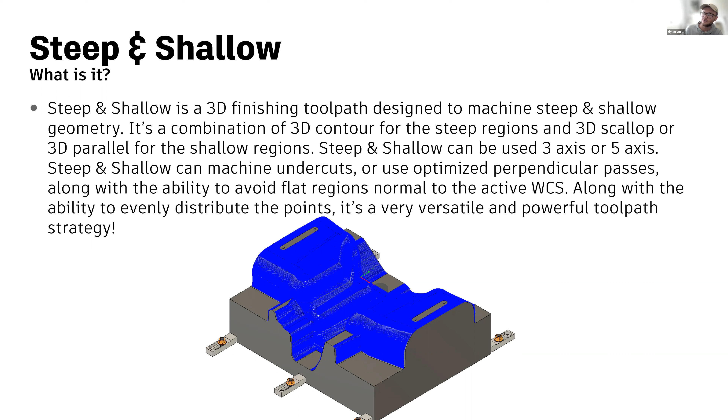Okay. So you'll all be pleased to know that that's my portion of the PowerPoint all done, and we are going to look at the toolpath within the product now. Now, again, this is going to be very casual. It's going to be very conversational. So don't hesitate to put your hand up and unmute if anything isn't absolutely crystal clear. If I haven't described something and you don't understand it, just ask the question and we can absolutely answer that live.

So first of all, we have a basic steep and shallow toolpath on the screen here. And firstly, it's worth noting that I have separated the shallow step downs from the steep ones, so we can clearly differentiate between the two. And this standard steep and shallow toolpath shows exactly what it's all about. You can see here that we are machining the steep regions and we're machining the shallow regions.

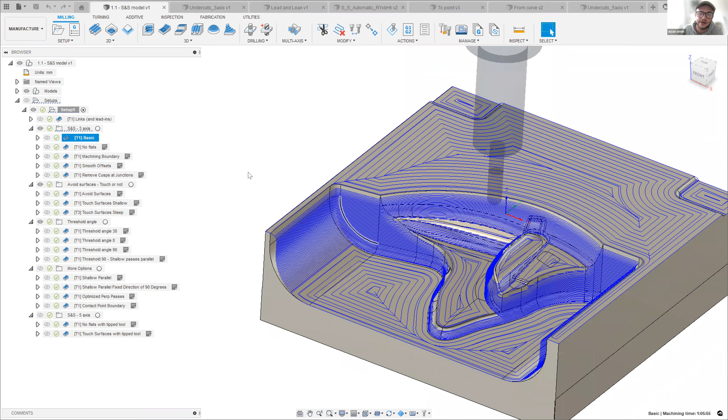Now, the first question which many people have is, how do we differentiate between what's steep and what's shallow? So what we can do is go into the toolpath dialog form, and in the 4th tab, which is our passes tab, where we describe the cutting environment, such as step over, step down, tolerance, stock to leave, etc. Right at the top here, you'll see threshold angle under steep and shallow. Now, the threshold angle is the angle which differentiates the steep and the shallow. So the default angle that we have here is 30 degrees.

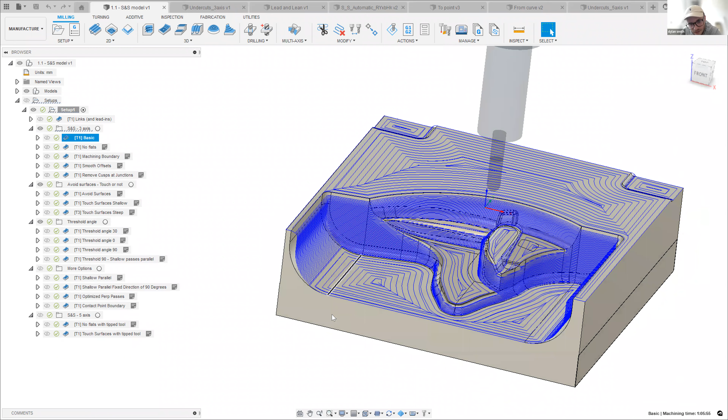Now, if I exit out of this, what you're going to see at around 30 degrees here is that these passes that are offset from this point here start to turn into a different style of cut. Now, that's that 30-degree angle, and that's the default value, as I said. But if we wanted to, we could very easily go into here and we could change that. And everyone has preference. Sometimes we'll have it a little bit higher, sometimes a little bit lower. And there's very good reason to even put it to 0 or even put it to 90, which we'll go through a little bit later on.

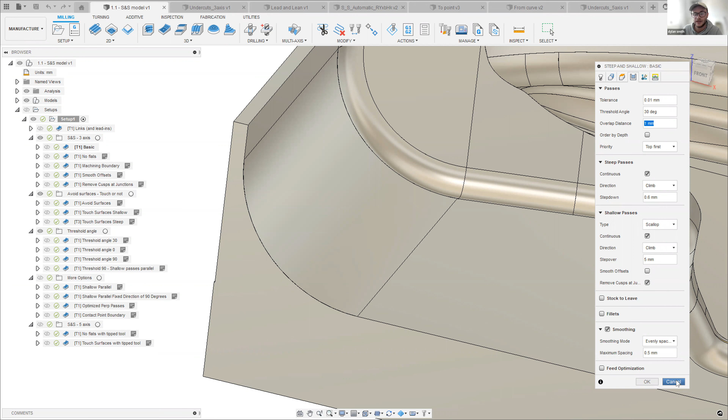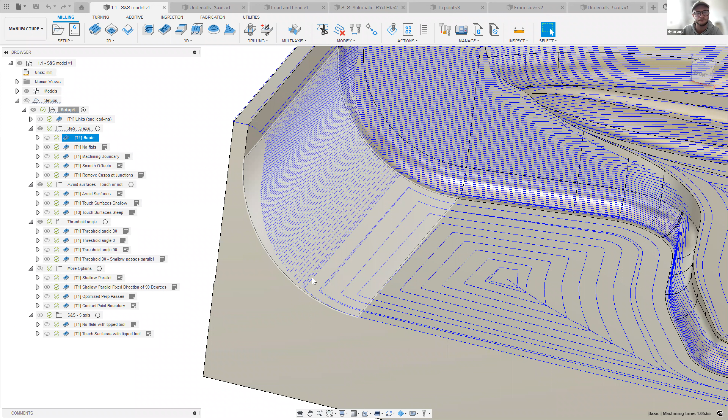The overlap distance is another key feature which is unique to steep and shallow. So because it's built up of numerous toolpaths, these toolpaths have to have an intersection point. They have to cross over each other by a certain distance. And the reason for that is because if they didn't cross over, we'd end up with residual material in between the two portions. So having some overlap distance ensures that we clear up all of the material that we need to clear up. Now, I really don't want to linger on the specific details, but if that's what you'd like to see as we go through, feel free just to post that in the chat.

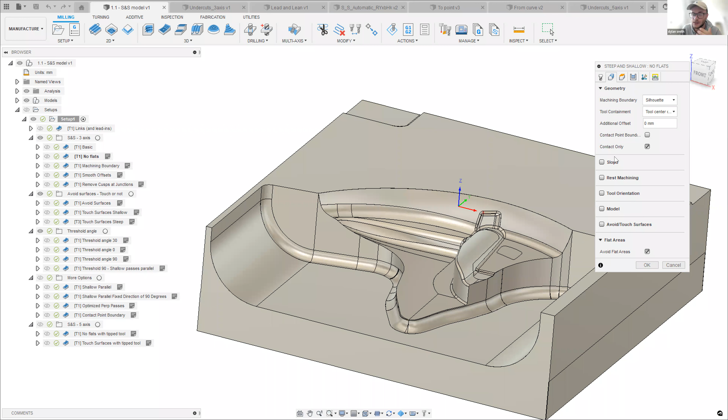So I'm going to be going through a couple of unique options in steep and shallow, and talking about why they're unique and why they're potentially beneficial to you. So the first one that I'm going to speak about is something that we call avoid flats. Now, if you have the Machining Extension, feel free to follow along, or make notes, even better. We have this area here called avoid flat areas. Now, when we are using 3D surfacing tools and using ball nose tools as our tool for the job, we generally don't want to machine planar regions like this, which are normal to the current work axis.

So if we approach these flat areas with this ball nose tool, there's a couple of problems that we're going to have. The first one is it's extremely inefficient. So if we have this top area here, to get a respectable surface finish, we're going to have to do a very, very small step over, something like 0.02 millimeters, and it's going to take us a hell of a long time. A much more efficient way to do this is to use a flat bottom tool and machine it with that. We're going to need far less step overs. It's going to take us far less time.

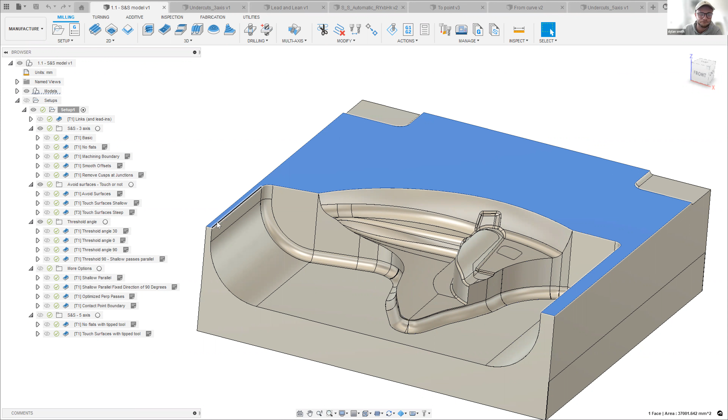The second benefit is to prolong our tool life. So when we're using a ball nose tool, one thing that we really want to avoid is cutting with the bottom and the center of the tool. And the reason for this is because, well, there's a couple of reasons for this. Firstly, there's not much speed in the middle of the tool. The further we move out of the tool, there's more cutting speed there, essentially.

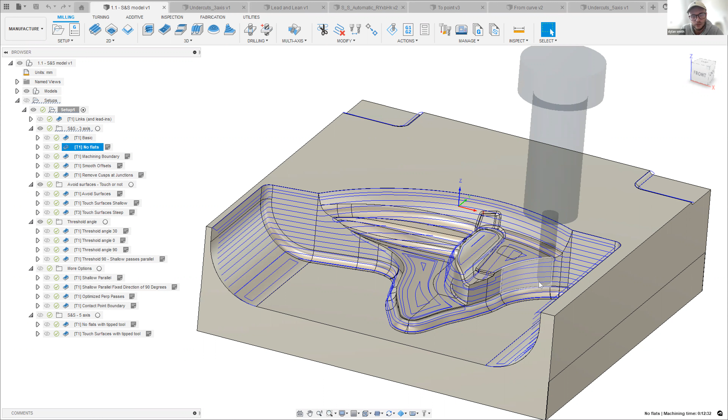Not only that, it's where the flutes meet, and there isn't really a sharp edge there generally if there's 3 or 4 flutes on the tool. So what we end up doing is more along the lines of rubbing the material as opposed to cutting it. So again, avoiding the flat regions is beneficial twofold. Firstly, efficiency, an absolutely massive one. We want to cut down on the time that we are taking to machine these components. And secondly, prolonging our tool life. Solid carbide tools are expensive. We want to make sure they last as long as possible.

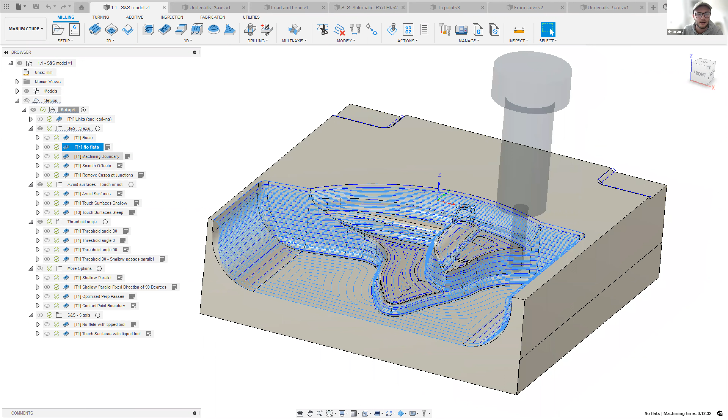Now, this option isn't particularly exclusive to steep and shallow, but if you are new to CAM potentially, it's nice for you to know that you can restrict your toolpath to a confined space that you've selected. So here, I only want to machine this portion here that's confined within this chain selection. So I've used a selection method within the machining boundary, and I've simply selected these edges here.

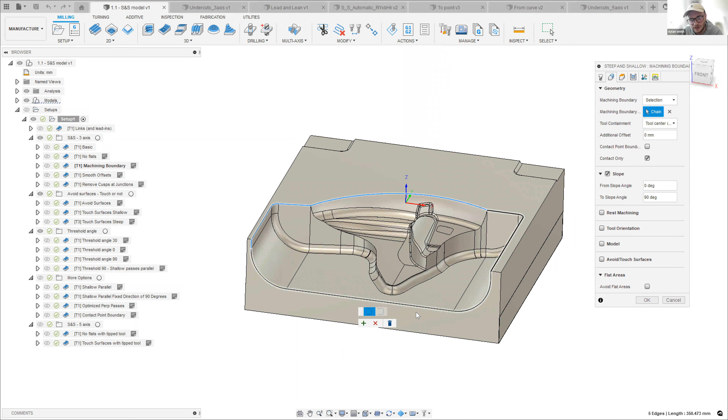And what we get is a 2D representation of that selection that I've made, and everything that is calculated from this toolpath will be kept within that selection. So again, that's a nice way of ensuring that we're not machining anything that we don't want to, and making sure that our toolpath is as efficient as possible.

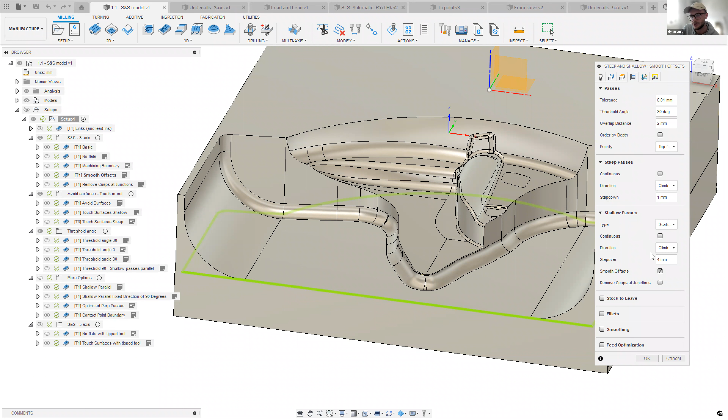There's a couple of other options which are exclusive to steep and shallow and that are very useful. So here we have an option called smooth offsets. Actually, maybe Craig can correct me in the chat if smooth offsets is exclusive to steep and shallow or not. You are correct. It is exclusive. Okay. So here we are again, we're in the 4th tab along. And the 4th tab is where we define our cutting conditions, and we have an option under the shallow passes called smooth offsets. Now, to really show you what this is, we're going to have to go from this toolpath to the next one.

So if we highlight both of them, what you're going to see is one of them has a fairly sharp turn to the perpendicular pass that it's going on to next. And the smooth offset has more of a filleted, smooth transition as opposed to that more jerky, sudden transition. Now, the benefit to smooth offsets is this is potentially something which can save you a little bit of tool life. It's not going to be a game changer, but it may save you a little bit. It's going to be less harsh on the machine because it's doing less of the jerky motions.

It may also save you some machining time because we're going to be staying at that programmed feed rate more often, because we're arcing round smoothly as opposed to a jerky motion, which is very abrupt. So our machine's going to like it, our tool's going to like it, our customers are probably going to like it because it's going to save us time.

Now, something to notice on these passes is that when we use a step over value, the step over value is calculated from side to side here. And one thing that unfortunately happens is that as we move down this section here, that value can be violated and we don't maintain the cusp height that we want to maintain. So the way that we can efficiently ensure that we are getting the cusp height that we programmed is by using something called remove cusps at junctions.

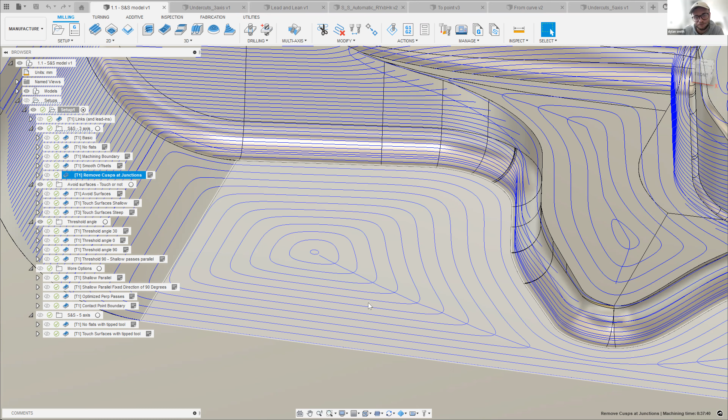So there are a few unique features within steep and shallow that can really make a difference. And again, we're just touching on some of the 3-axis stuff at the moment. We are going to jump into some of the more complex multi-axis stuff in just a while.

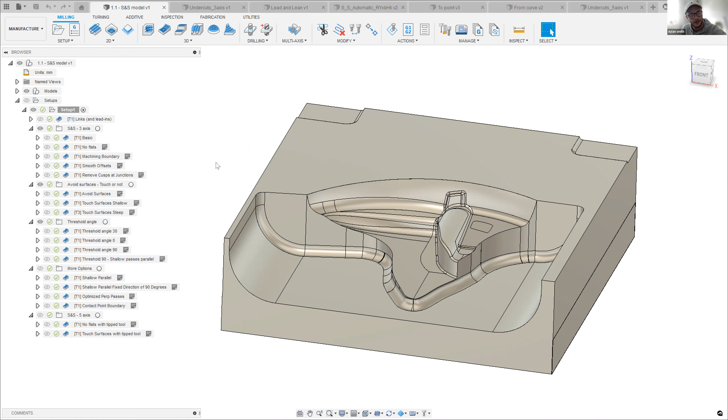So again, not all of this is completely unique to steep and shallow, but there are some options in here that you may not know about and may greatly increase the efficiency of your programs. So we're going to look at touch avoid surfaces. Now, I mentioned a boundary earlier, and we selected the outer profile of this section here to keep the toolpath within that. We can use that, and we can also use something called touch avoid surfaces. We can use that exclusively, or we can use it in conjunction with a machining boundary.

In this situation, I have selected this particular face here to avoid. Sometimes we do this because if it's something quite complex, if there are various different chains and it's difficult to get a boundary, sometimes it's much easier for us to just simply select the surface and say we just want to ignore that. So that's what we've done in this case. And you can see that the toolpath is exactly the same as it was up here, but all we've done now is avoid this face here.

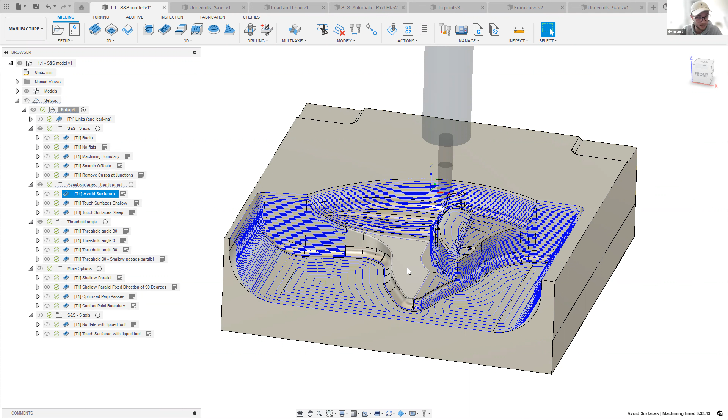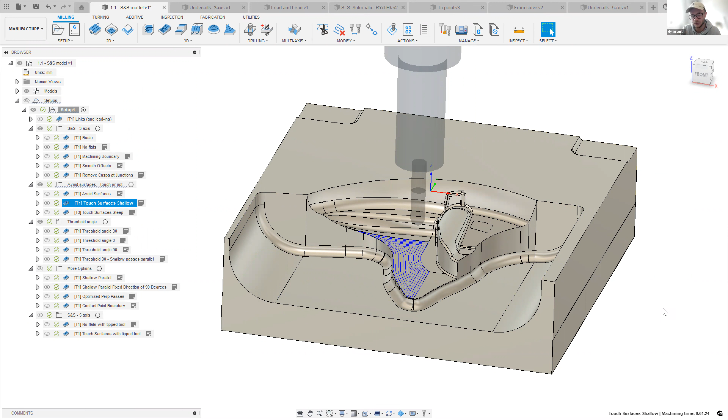Again, that can be very useful for avoiding particular surfaces which may require a different tolerance, a different surface finish, or a different manufacturing strategy. It's something nice to keep in mind, a nice tool to have in the toolbox. The opposite of that is touch surfaces. So again, going into the second tab, we've selected the same surface as in the previous toolpath, but we've simply selected touch surfaces. That means it's going to invert the selection; as opposed to avoiding it, we are now choosing to just machine the surface that we've selected.

And there's just one more example of something that we've selected which could have potentially been quite difficult to get a boundary around, because remember, the boundaries are 2D. And if we're looking at a steep portion of geometry, by the time we've selected that boundary, that may end up being very small. So touch avoid can be very useful.

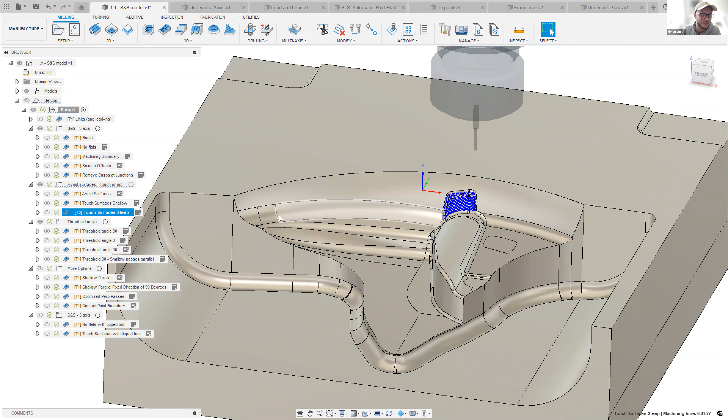Now, a few more options to go through here. We've got options to use parallel, and what we'll see in here is that we are using a parallel pass, so a step over of 3 millimeters, and you'll see how we are doing our shallow regions using a fixed direction of cut, and the steep regions are still acting as we would have expected them before.

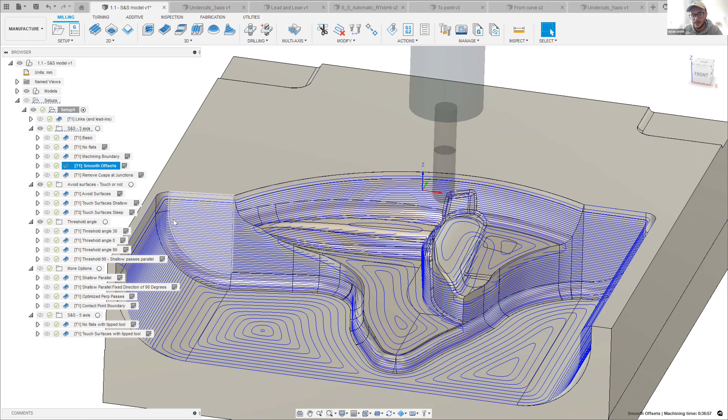The benefit to using parallel is that generally when we're only cutting in one direction, we can get a superior surface finish. But one of the issues is that we may be potentially bunching up some of these faces. So on a more free-form surface like this, something like scallop will be better because it'll offset from the outer curves. But parallel and scallop can be used interchangeably, and each one suits different situations for different geometry; they both have pros and cons.

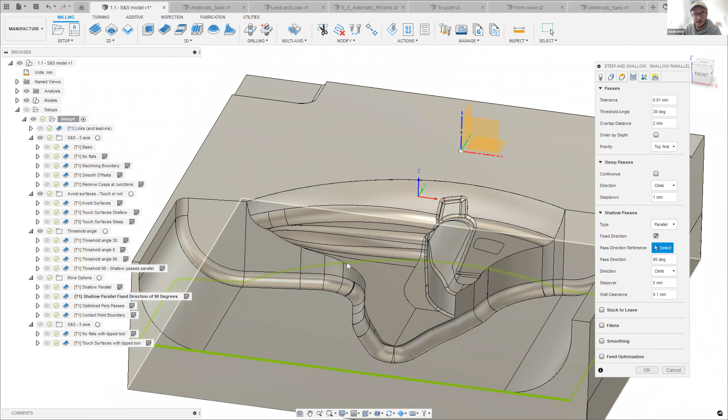This is another parallel, but all we have different here is that we've set a fixed direction. So with parallel, if we select to only go down that edge, then our parallel cuts are going to run parallel to the selection we've made. But a nice tip to note is that if we don't make a pass direction reference, the parallel cuts will run parallel with the x-axis.

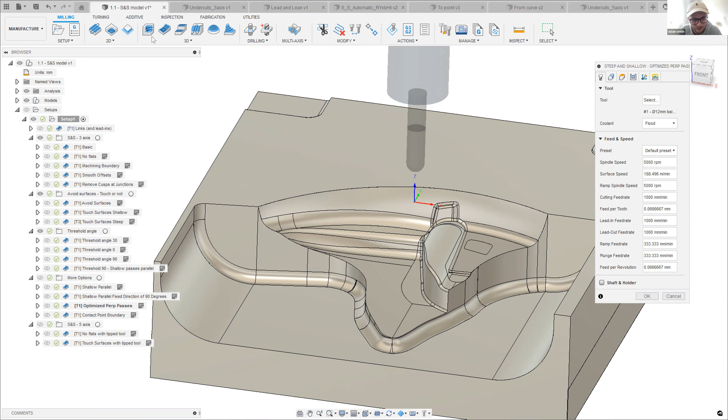And I mentioned something called optimized perpendicular passes earlier. Now, for those who are in the mold making industry, this is a very powerful piece of technology which was brought over from PowerMill, which is one of the leading products in the mold and die industry. And the reason is, as I mentioned earlier, we typically like to follow one direction. That gives us a very nice surface finish.

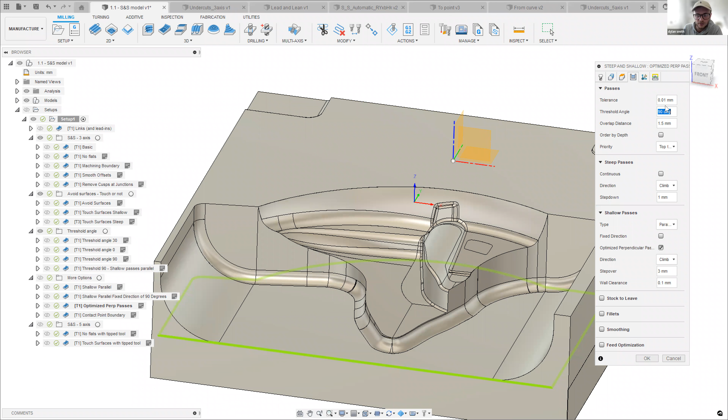But when we're using parallel, because it's designed for shallow geometry, as we start to go up steep walls like this, where the steep wall is running parallel to our cut direction, the toolpath starts to fragment and we don't keep the constant step over anymore. So when we set the threshold angle to 90 degrees and turn on optimized perpendicular passes, when we get to a 45-degree wall, we have parallel passes which are perpendicular to the other ones.

So you can see these here are all fine. These are going to give us a very beautiful result and a very beautiful surface finish on our component. But as we get to these steeper areas here, Fusion 360 is intelligent enough to input perpendicular passes to bridge the gap and ensure that the passes running up the steep regions aren't fragmented. And we're going to maintain that constant step over that we inputted.

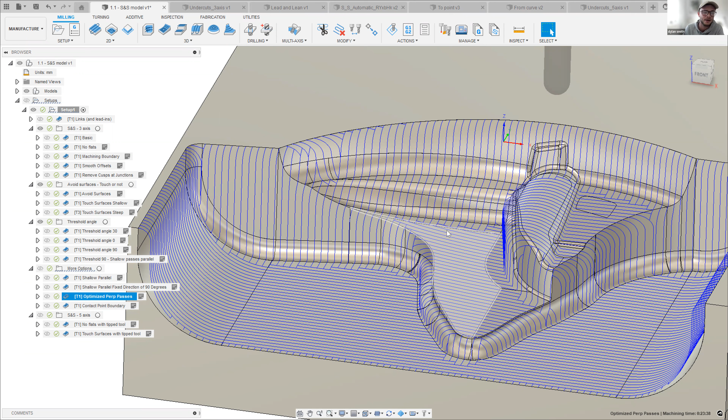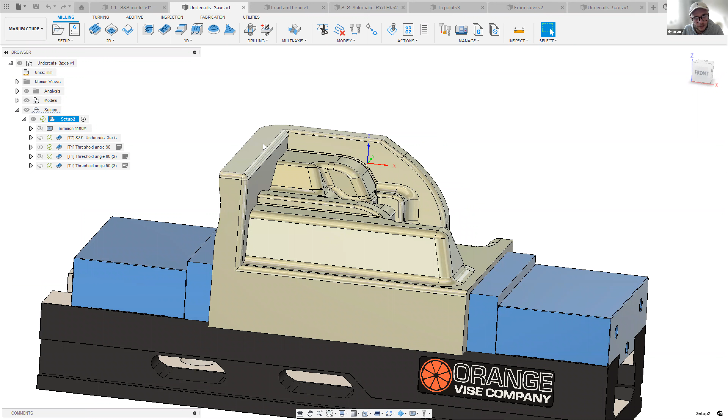So moving on to a little bit more 3-axis stuff, and we are going to look at undercuts. So when we think of an undercut, what we're thinking of is a region of geometry which isn't accessible in a 3-axis orientation to our work plane. So if we look at our component here, we are coming in a very conventional manner. We've set our component up in the vise, and we are going to be coming in from the top here. Now, it's pretty apparent to see that we're not going to be able to access this area here in a 3-axis manner with a straight fluted tool.

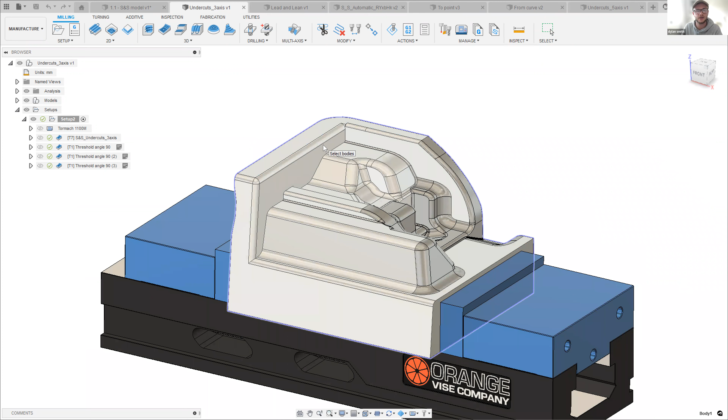Now, a little tip, which is slightly off piste, which may be of value to people, is that we have a tool called accessibility analysis. And what that tool does, it allows us to select a component. I'm not sure where that's gone there. I think I've got one. So it allows us to select a component, and then it allows us to select an axis in which we're going to come from.

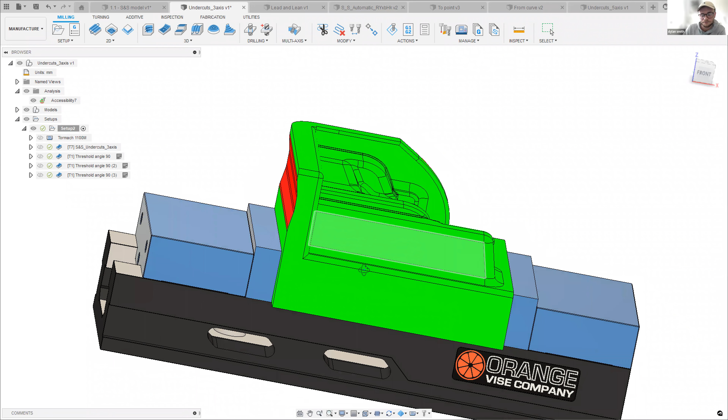And in green are the areas which are accessible from that orientation, and in red are the areas that are not. Now, when we select the axis to come from, we select a planar face, a linear edge, or a true cylinder. So in this case, we've just selected the top face. And that's all saved in the browser tree over here, and we can turn it on or off at our leisure.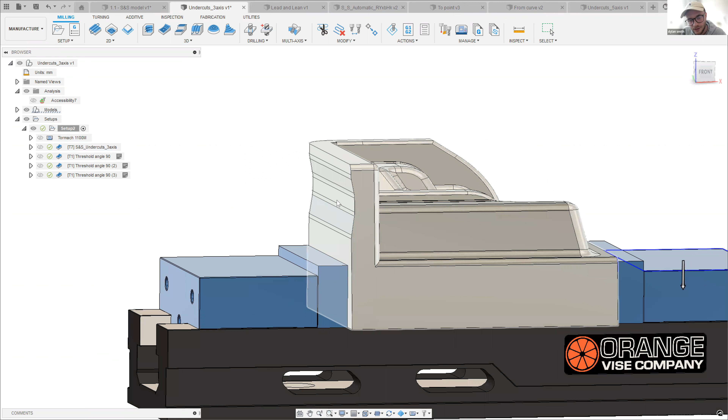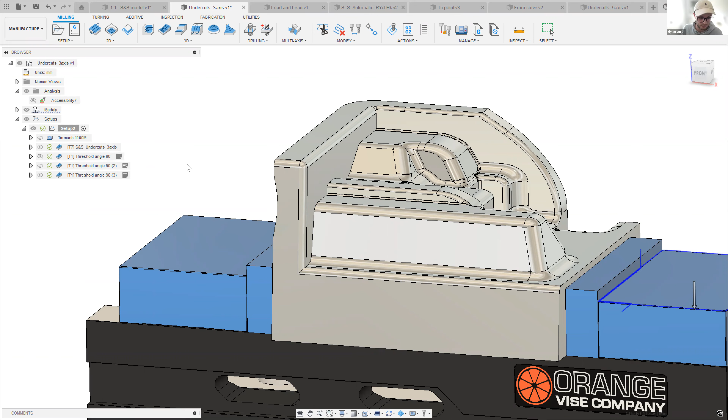Now, the way that we've managed to machine these undercuts in a 3-axis manner is by using a lollipop tool. Now, a lollipop tool is a tool that has a shaft, and the cutting portion of the tool is larger than the shaft, which means that we can access areas like this without leaving the 3-axis orientation. So the toolpath that we have looks something like this, and you can see this is the tool that I've used. Let me just show you how we got to this result.

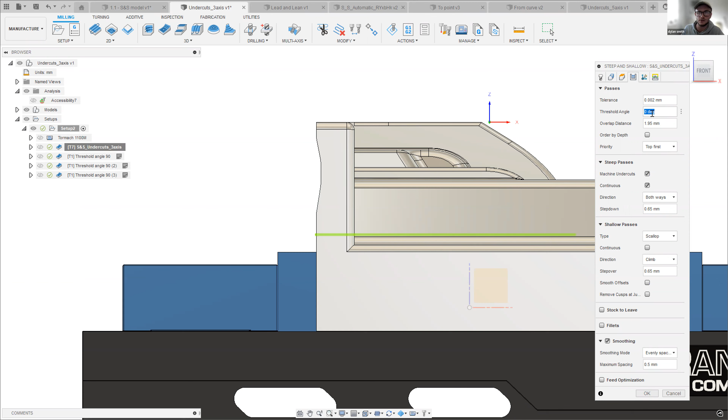So I mentioned at the start that Steep and Shallow is a blend of 3D contour, 3D parallel, and 3D scallop. And we actually have the ability to turn Steep and Shallow into any of them by using the threshold angle. So when I turn the threshold angle to 0 degrees, that forces Steep and Shallow to be steep only. Now we are only using 3D contour. So we're able to get results like this from a toolpath which is designed to do steep and shallow areas.

This is one of the key benefits, and I mentioned right at the start that Steep and Shallow is a very versatile tool. And this is one of the aspects which adds that versatility. Being able to tweak the threshold angle, being exposed to these more complex options as we tweak the threshold angle really allows us to do a lot with this tool. So again, if I turn the threshold angle to 10, what you'll notice is that this option disappears. But as we turn it to 0, that option reappears.

And that's because, of course, when we are machining undercuts, we only want to use the steep variation of the toolpath. So it doesn't make sense for us to expose that option when the threshold angle is anything but 0. These can be quite difficult things to find. So again, if you've got a pen and paper, or if you are in Fusion, it's worth making notes of this stuff. Threshold angle 0 means we are using the steep portion of the toolpath. When we change it to 90, we are then using the shallow portion of the toolpath. But of course, it defaults at 30.

Another point that I want to talk about, and again, I apologize if this is like drinking out of the fire hose, but it's a very complex toolpath. There's a lot to speak about, and we only have an hour, unfortunately.

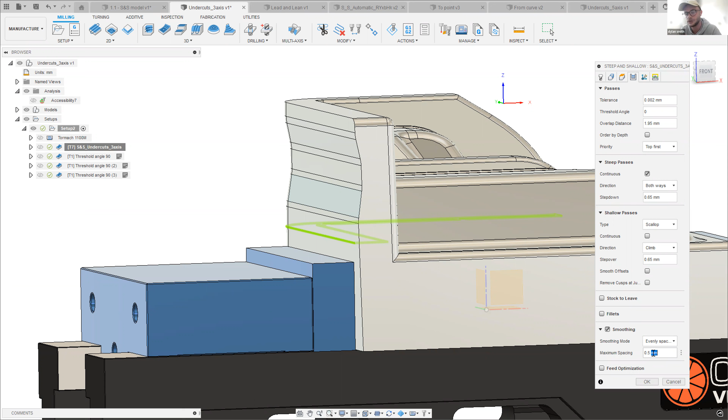Now, when we have a more fluent, smoother motion on our machine, what we end up with is better surface finish results for one. And not only that, the biggest unexpected benefit we get is that we generally see a more efficient toolpath in regards to cycle time. So because the machine is maintaining the programmed feed rate more often, because of the more fluent axis movement, we generally have a more efficient cycle time and again, a better surface finish result. Now, this is useful when we're looking at 3-axis toolpaths, but it really comes into its own when we start to look at multi-axis toolpaths and when we have all the axes moving at once.

Now, we are going to switch it up a little bit and look at some of the multi-axis, or maybe is it worth me answering a couple of questions or looking at the chat just before we transition?

I think you got everybody's mind blown. There's no questions on this. I'm just sitting back learning.

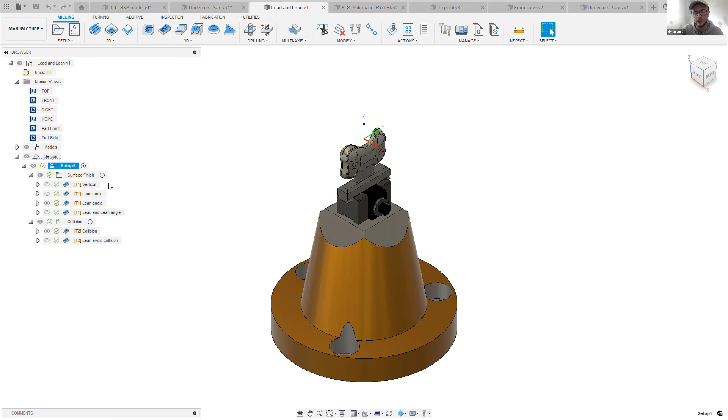So now we're going to move into the multi-axis part of steep and shallow. And if you thought that this was a very powerful tool, looking at the 3-axis stuff, the 5-axis stuff just compounds that even more than what you already thought. So we're going to initially look at what I would probably say is the most simple area of multi-axis that we have. And this is what we know as lead and lean.

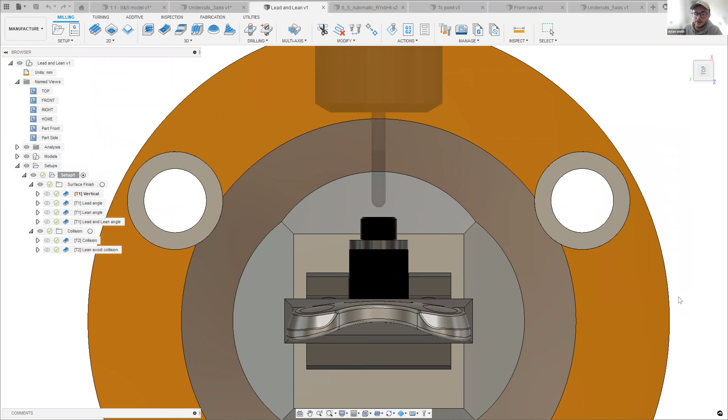So I spoke about a very prominent issue earlier within milling specifically, and this is when we're using ball nose tools and we are machining with the center of that. Let me just turn my leads and links off. When we're machining with the center of the tool, there's no surface speed in the middle, and there's also not that many flutes there. So we are wearing the tool away quicker than we would have wanted to, and we're probably not getting the surface finish that we expected.

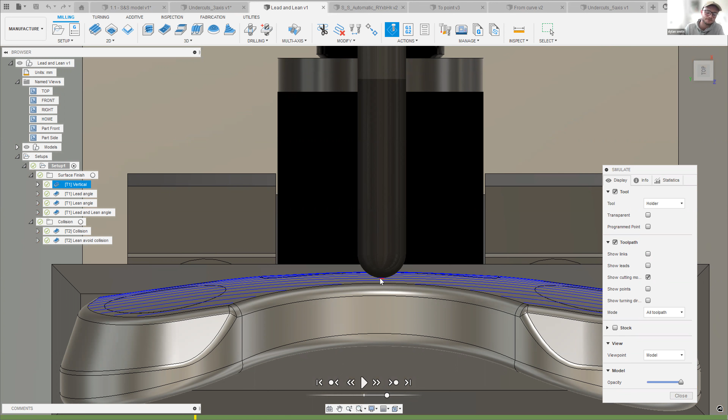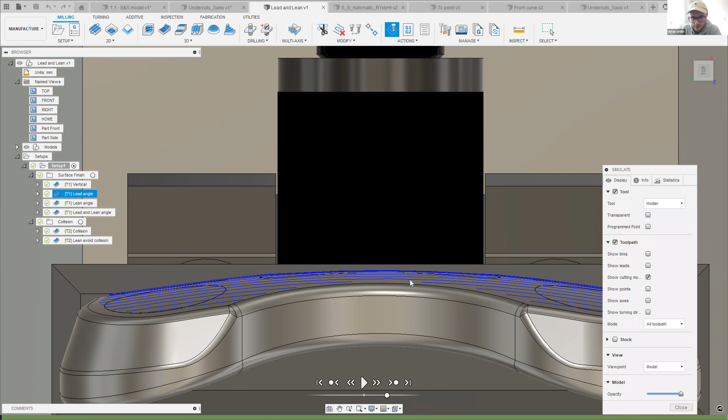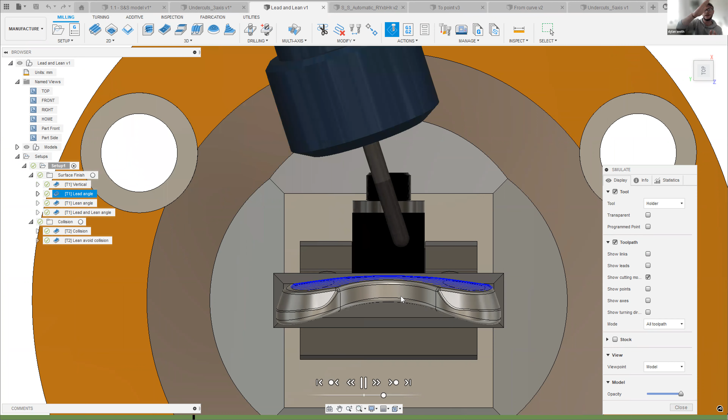An easy fix for this is to use something called lead and lean. So when we say lead and lean, a good way to think of it is when we are leading with the cutting direction. If I just show you that on here, that'll be better than me butchering the explanation. If I can find a point. So what you'll see there is that our tool has been knocked over slightly. Now, this is always going to be leading forward and leading parallel to the cut direction. So if I give this a play, what you'll see is that we are constantly tilted forward there. If it was going 2 ways, the tool would then come back the other way.

But this is a very good way to move that cutting point from the center of the tool and to get it more onto the flutes. You are going to see a better surface finish result using this technique opposed to using the middle of the tool. Now, we can also do something called lag. A good way to think of it is lead is leaning forward, lag is lagging behind. Lead is generally preferred, but I'm sure that lag has its applications within the industry.

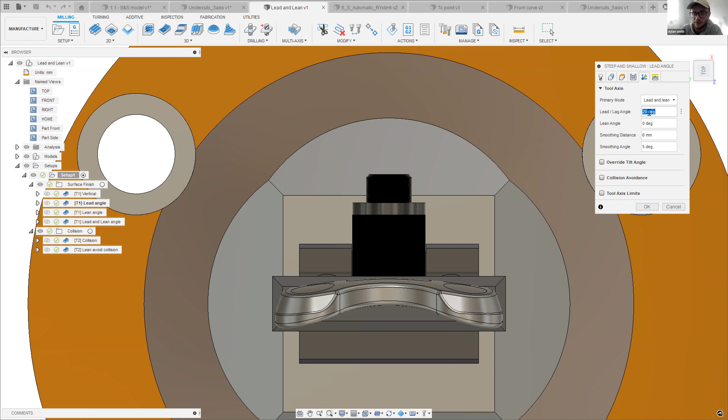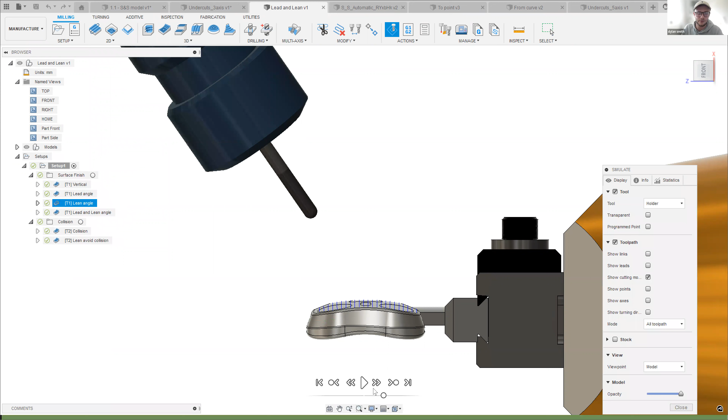And then we also have something called lean as well. I'm sure most of you have probably figured out what lean means, and lean is essentially perpendicular to lead. So opposed to leaning parallel with the cut direction, we are now leaning perpendicular to the cut direction. Again, similar reasons why we do this. One reason could be to potentially avoid any work holding that we've got. So that would be a very valid use case in this example. But again, primarily one of the key benefits here is getting that cutting point from the center of the tool.

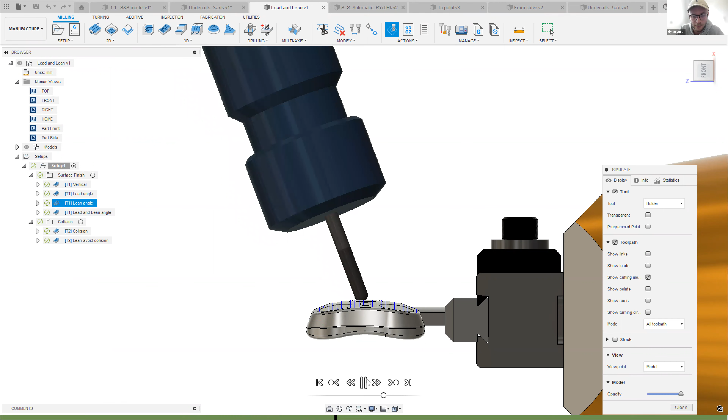Just check my time, 30 minutes past. Okay, so I've got about another 10 minutes.

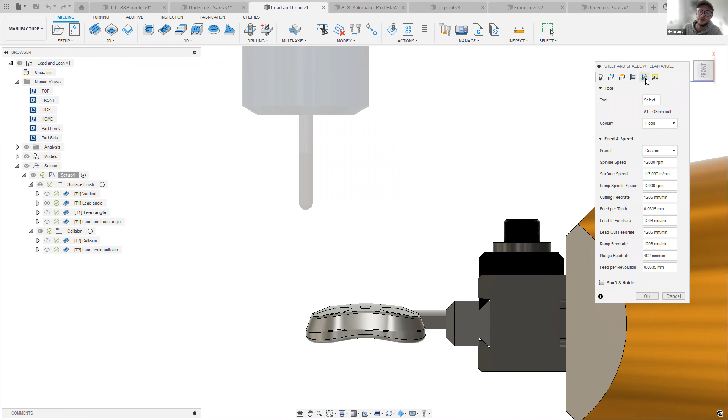I just want to ensure that we went through how we set that within the toolpath. So if none of you have used any multi-axis tools within Fusion before, you'd be used to the 5 tabs on the top here. When we have multi-axis capability, we have this 6th tab here, which is our multi-axis tab. Now, it's going to be very difficult for us to get through everything in a comprehensive manner today, but what we've done here to get lead and lag is select lead and lean as our primary mode. And we've simply just been able to input an angular value within one of these areas.

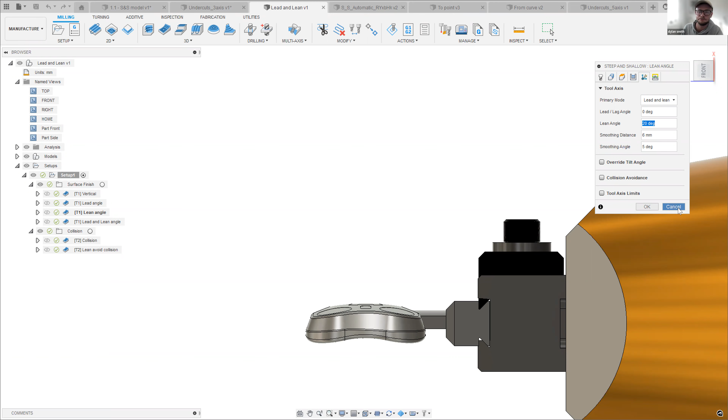It is genuinely that easy to create a multi-axis toolpath, and that's one of the key benefits to using Fusion as your multi-axis solution. It's the power, it's the versatility, it's the ease of use, it's the familiar user interface. There's a lot of benefits. So if we move on to another example here, and this is a vastly different part to the last example, showing you how many different kinds of geometry steep and shallow can handle.

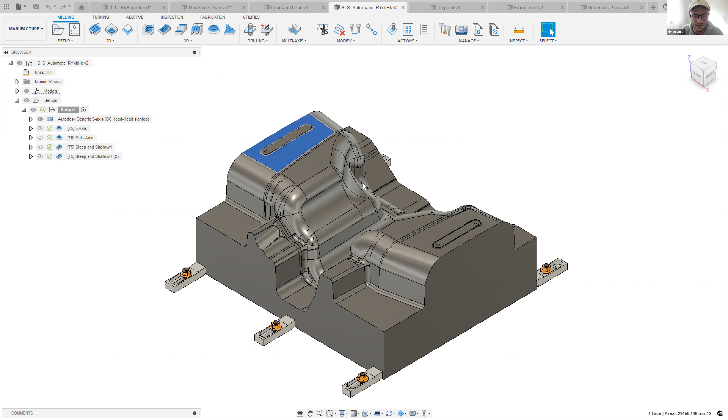And this is what we know, or what Craig would call a very complex feature-rich part with various vertical walls, various pockets, cavities, and it's extremely difficult for us to machine a component like that. It's got super steep pockets, a lot of different angles, a lot of free-flowing surfaces, steep areas, and shallow areas.

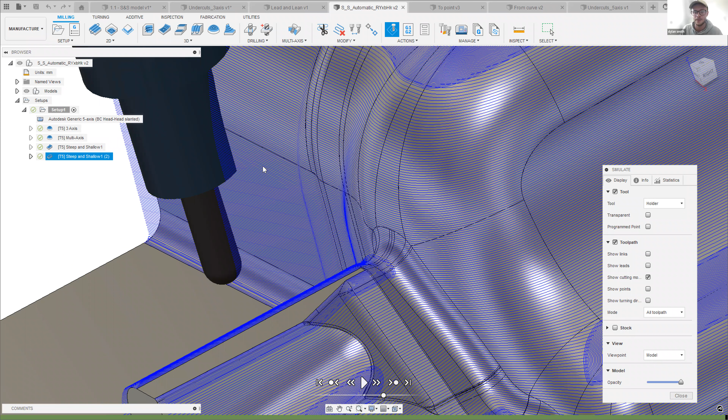One of the biggest problems is that when we come to an area like this down here, I believe this is a 3-axis toolpath if I simulate it, what you're going to notice is that I cannot machine this vertical face with an appropriate length tool in a 3-axis orientation. For me to machine this, I would need an outrageously long tool, or I would need to do a series of 3+2 indexable moves, which is just not a very efficient way to do it.

So one of the lowest touch forms of multi-axis that we have within steep and shallow is something called automatic collision avoidance. Before I show you the magic behind the simulation, the way we do this is by setting a primary mode. We set up a primary mode, which is vertical, and the collision avoidance is set to automatic. That's all I've done. There isn't any more magic. It's not smoke and mirrors. That is literally all that I've done.

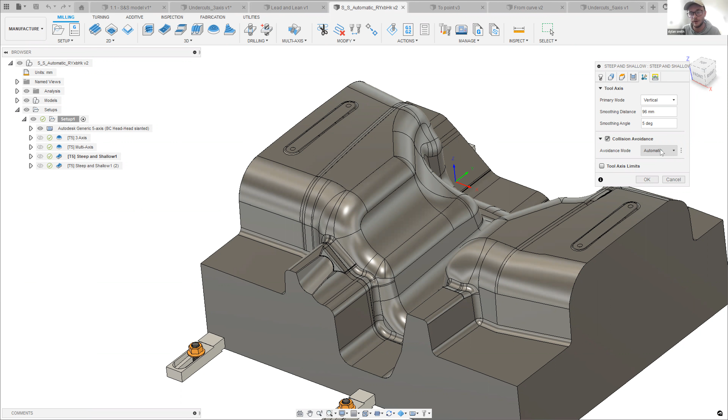Now what Fusion 360 does here is calculate a 3-axis toolpath, and then it inputs appropriate tilts away from the component where it knows there's going to be a collision with a shaft tool holder. So if we go down here, before our tool holder was colliding with the component, what you see now is that Fusion 360 has automatically tilted away from the component by an appropriate amount to avoid the collision. The benefit here is that we're able to use a tool which is a sensible length, and we've managed to machine the entire 3D surface component in one go.

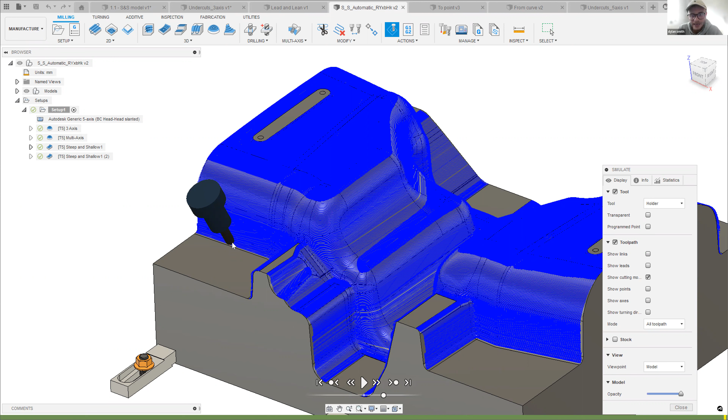Another point to mention is that we generally don't want to do multi-axis where we don't need it. When we have excessive C-axis motion, we tend to suffer from a surface finish standpoint. So one of the key benefits to automatic collision avoidance is that if it knows there isn't any danger of a collision, it's going to stay in 3-axis mode. But when we come to areas like this, where it knows there is a collision, it's intelligent enough to tilt away from the component by an appropriate amount.

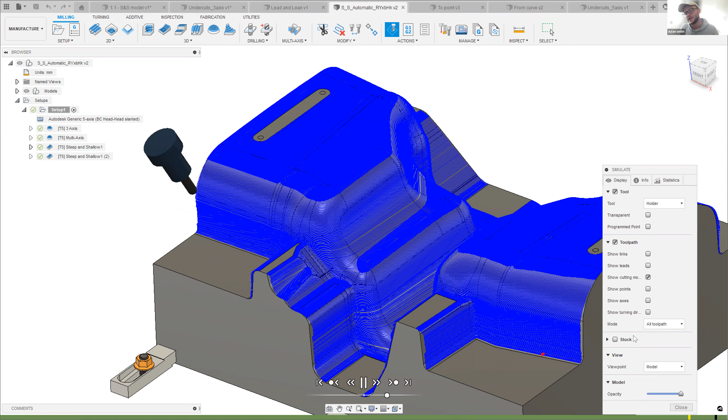So it really is super clever, very automatic, very useful if you're thinking of machining any complex parts in the future. Technology like this makes you much more competitive in the market. Imagine quoting for a job like this only having 3-axis capabilities—you're absolutely not going to compete with others who have multi-axis machines and powerful multi-axis technology.

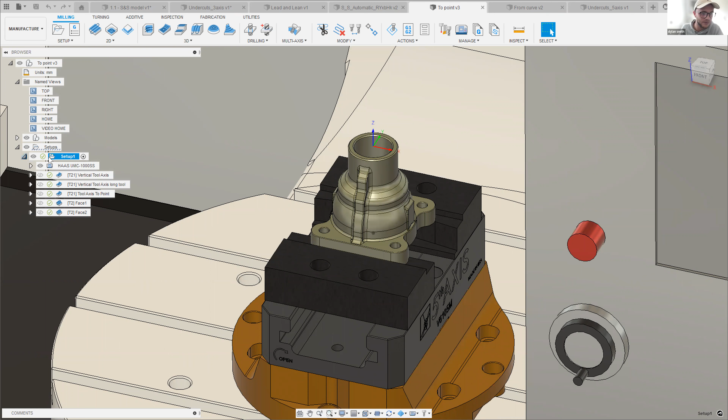Now, I am definitely not going to have enough time to get through all of this stuff, but I am going to run you through a couple more examples. So here we have what I'd describe as a fairly simple component, but if we scratch beneath the surface just a touch, what we'll quickly realize is that if we want to machine this component with a sensible size tool, we're not going to be able to do it in a 3-axis manner.

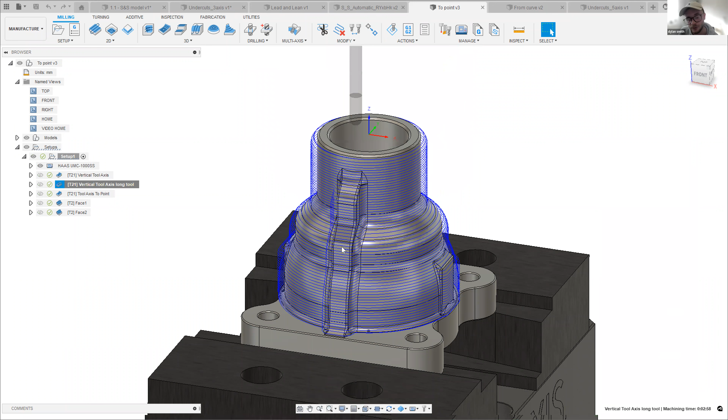These red areas at the bottom here is Fusion telling me that you really need to take a look at this toolpath, because your holder is plowing through the component, and that's not going to be good for anyone. So one option, not a viable option, is to have an outrageously long tool. One of the problems we have here is the surface finish on this component is going to be not desirable at all. Our tool is actually going to deflect, meaning we're going to leave excess stock on the component, and we're probably going to break our tool if the material's got anything about it.

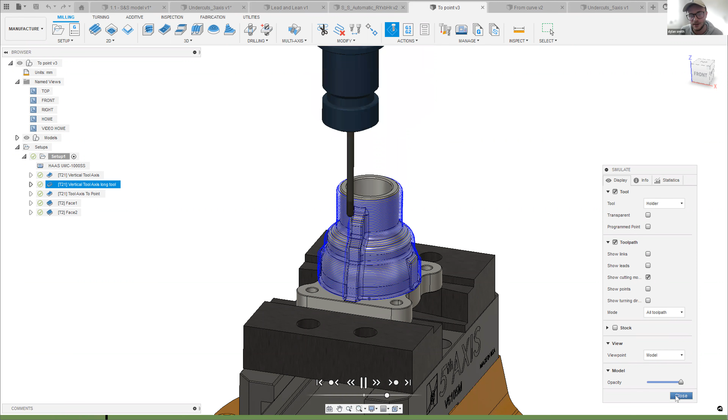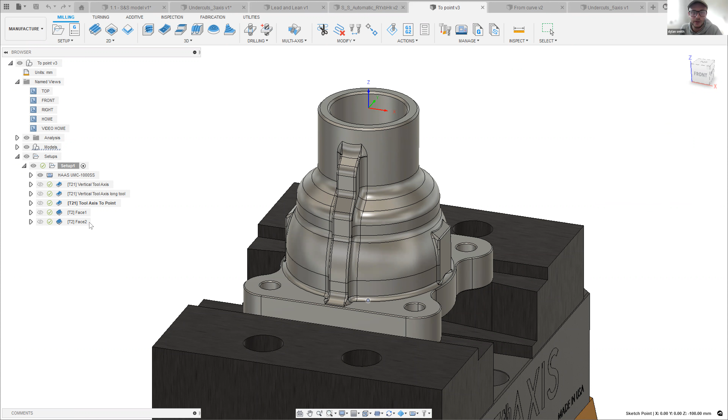So what I've done within Fusion is use our multi-axis options, and I've used something called to point. When we use to point, we create a point within the design workspace. And when we're using to point or to curve, that point or curve is generally lower than our workpiece, and it's generally suited to protruding forms. What you'll notice is that as we simulate this, if we imagine the middle of our tool has an infinite axis going through it, that axis is always going to maintain contact with that point. So we end up with a toolpath that looks like this, and this is a vastly more efficient toolpath than the one we had before with the super long tool.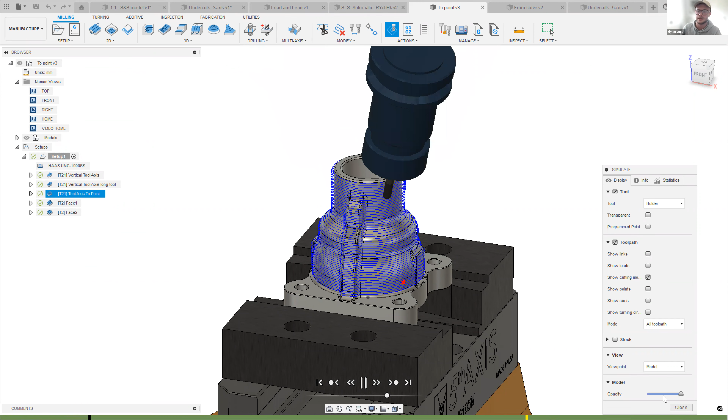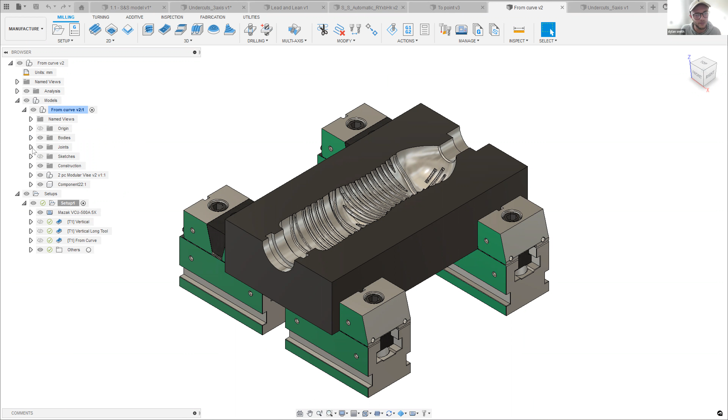Now I'm going to go through one more example since we're coming to time, and this is slightly different. I just spoke about to point, and now we're going to look at something called from curve. When using multi-axis methods such as to point or to curve, it's generally suited to protruding forms. From curve or from point is more suited to recess forms such as this.

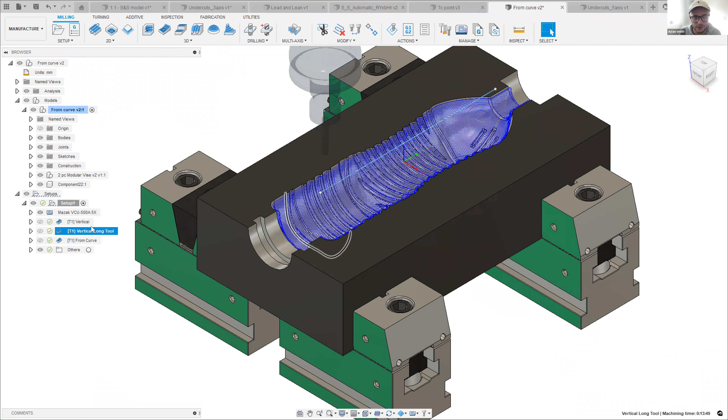Let's tee it up with the problem we've got. It looks like a fairly simple component, but upon simulation we have a whole load of areas where our tool holder is colliding. We all know the alternative, use a longer tool. I really don't want to do that.

So what I'm going to do is use from curve. You'll notice that with this curve here, my tool is always maintaining contact with that curve.

Now I'm going to throw one last thing in before I hand over to Craig. I don't like this toolpath, and the reason is because the axis tilt is far more than I want it to have.

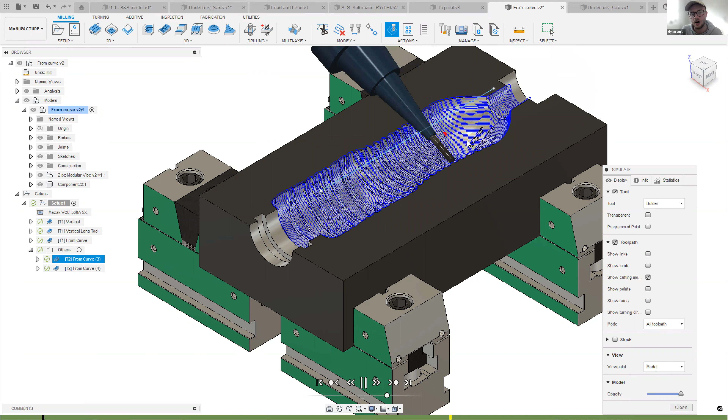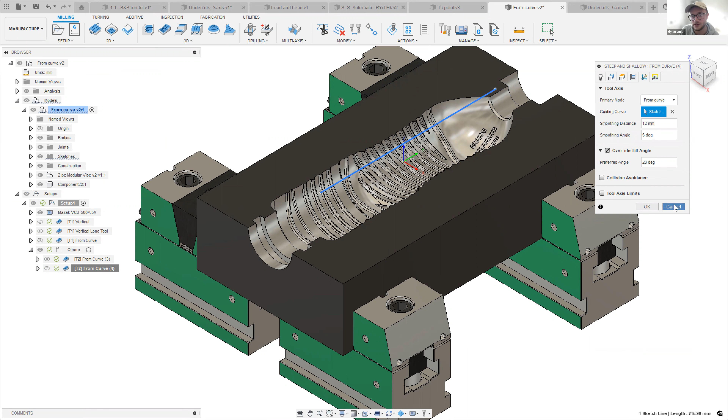There's a really nice option within the multi-axis tab that allows us to restrict the degrees the tool tilts to. So we have primary mode from curve, and in our override tilt angle we have a preferred angle of 28 degrees. What this means is our tool is still being driven by the curve, but it's now governed by the preferred tilt angle to ensure it doesn't go further than what we have specified.

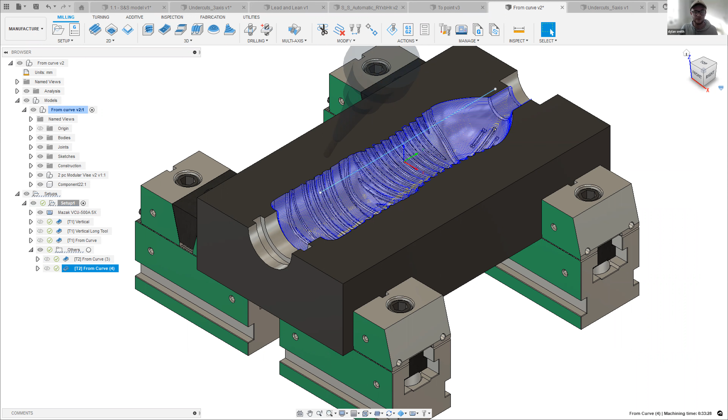Now that was a hell of a lot of stuff within half an hour. I'm sure it may have been quite difficult to keep up with, but hopefully that really demonstrates the power of steep and shallow. It's one toolpath, and it's kind of crazy to think that all of that stuff is in one toolpath, but it really is the case.

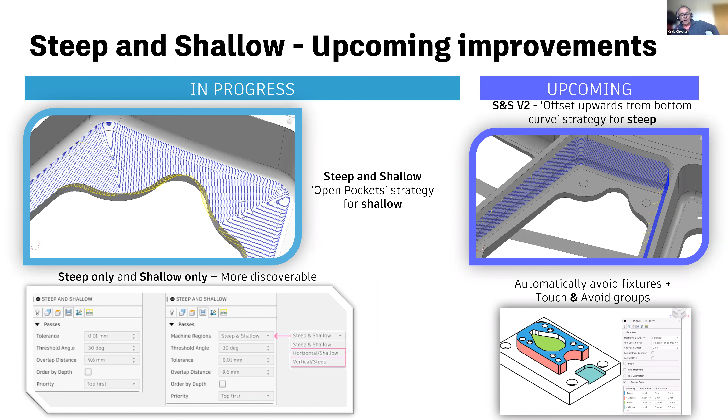Also with touch and avoid, at the moment you've got the option to touch or avoid, but you can't touch and avoid. So we're adding flexibility by allowing the user to specify multiple touch groups and multiple avoid groups. Each group can have an independent stock to leave in the case of touch, or an independent clearance value in the case of avoid. This enables you, if you're machining in a shallow region, to avoid the tool bumping into a nearby steep wall and marking it. You can specify these groups to enable automation by pre-specifying where you want clearances or additional stock to leave.

So Dylan showed you one example with the 5-axis automatic collision avoidance, and of course the priority for that feature is to avoid collisions, and it does that very, very successfully.

But what is also undesirable is if the contact point on the tool is constantly changing between passes. We'll get differing amounts of deflection, and issues such as the runout on the tool and how well it cuts at that point will change if the contact point changes. So with the automatic 5-axis collision avoidance, we're putting huge effort into keeping the contact point on the tool much more consistent. The real benefit we want is better surface quality on your finished part, and that's the same deal for the image on the right, where we're looking to have much smoother C-axis transitions.

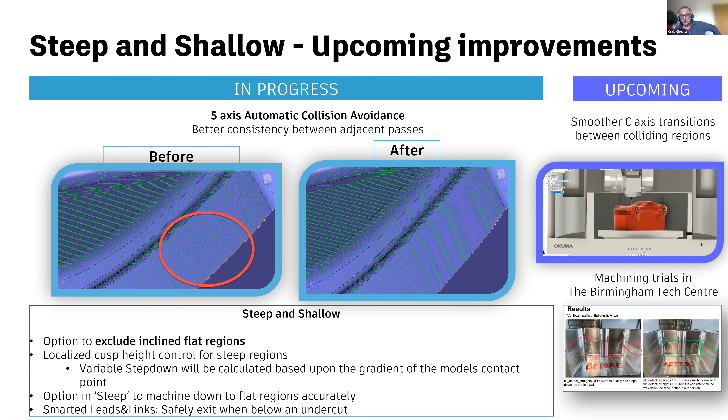Are there any questions? I've typed in some chats and the text disappears. So I'm wondering if my Zoom is acting funky. Yeah, is anybody else seeing any comments? I can see what you posted, I think. Okay, good. You said feel free to ask your questions here in the chat. Okay, so you're seeing my stuff. I'm just not. That is bizarre. I've never had that happen before.

I guess there's no questions. I mean, it seems like a pretty deep topic, and it's awesome. It's helpful. So I want to thank you guys. If there's no questions, we'll just wrap this up.